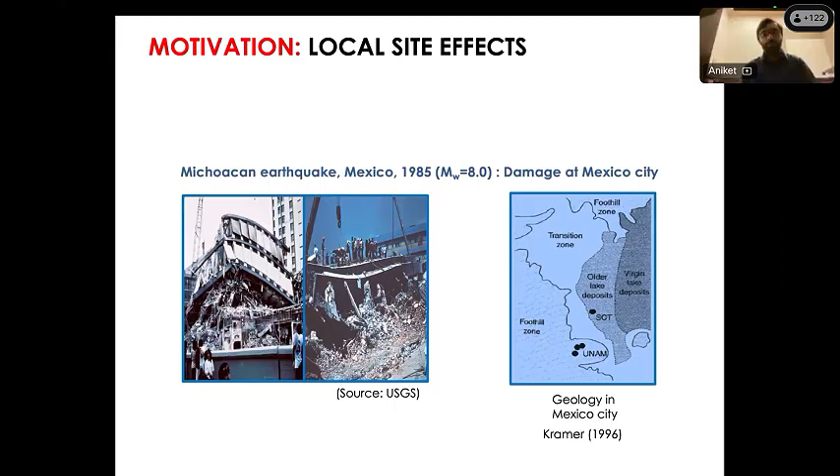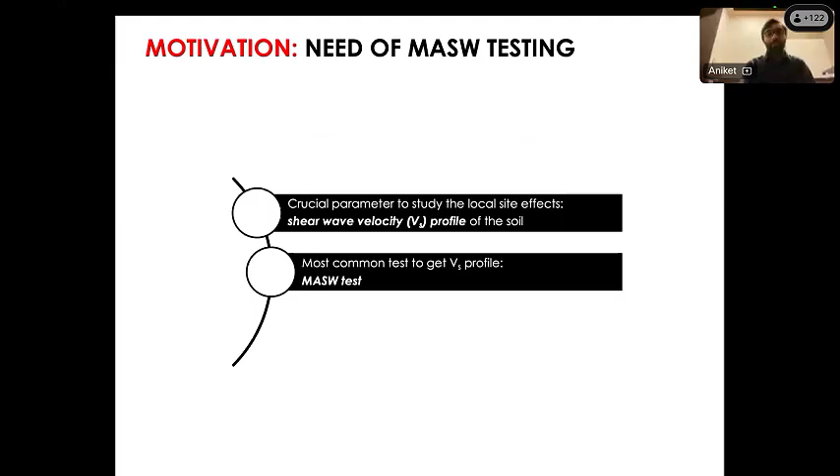So why is this MASW testing important? As we saw in the previous slide, it is very important to have knowledge of the soil characteristics, and for that the very important parameter is the shear wave velocity profile. For that, the most common method currently is the MASW test, although it was developed in 1999, but after that it has gained a lot of prominence.

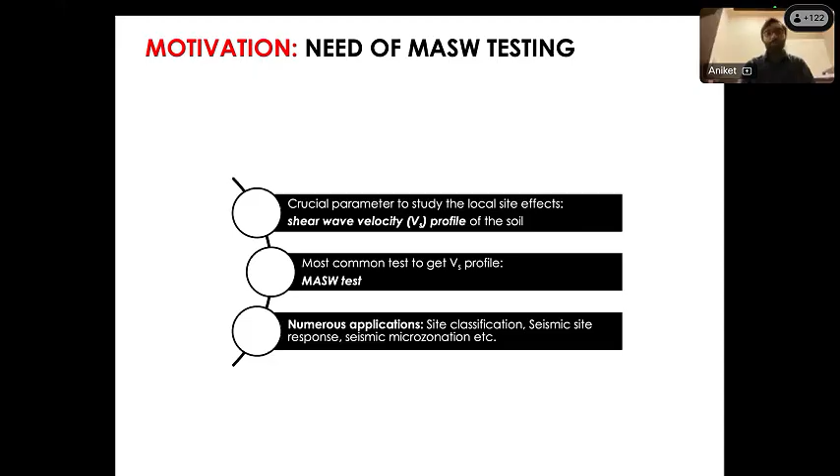Once you get the shear wave velocity profile, there are numerous things which you can obtain. First is site classification, then seismic site response, how the soil will behave. Then for any area you can do seismic microzonation. Even seismic hazard analysis can be done, and even for liquefaction analysis, the shear wave velocity profile is an important parameter. So with all this, the importance of the MASW test has increased in recent years.

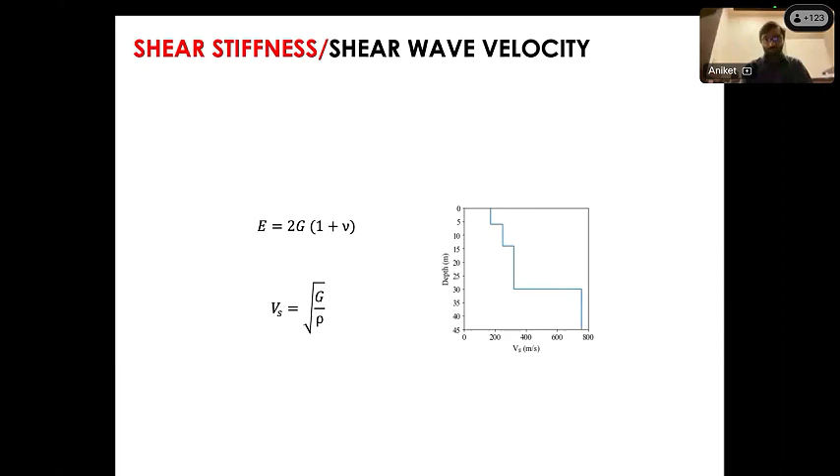Although this would be known to everyone, just for recap, I'm showing what shear wave velocity is. It is related to the shear modulus of soil, and on the right hand side a typical shear wave velocity profile is shown. It is obtained in a stepped shape from the MASW method, showing how the shear wave velocity varies with depth.

So what are the common tests available to obtain the shear wave velocity profile? Initially, conventionally, these geotechnical tests were preferred, which includes all the known tests: standard penetration test, cone penetration test, dilatometer and pressuremeter test. However, they have some limitations.

For example, from the standard penetration test, we obtain the N value, and to get the shear wave velocity we need to use a correlation between N and Vs. There are so many correlations available, and if you use different correlations, the Vs value obtained will be different. Another thing is the N-Vs correlation would be applicable only to a particular region. For example, somebody has developed an N-Vs correlation for Calicut, so that will be applicable to this region only.

So that is why when geophysical tests came, their use started gaining importance. The first test developed was spectral analysis of surface waves, in which only two geophones were used to record the waves, but it had its own limitations. Then multi-channel analysis of surface waves was developed, which contains multiple geophones, and its processing is even better than the SASW test. So it is the topic of my research till now.

Then there are some other methods also available: cross hole, uphole, downhole, seismic cone tests. These are all geophysical tests, and they have advantages in all three aspects: time, effort, and money. The time consumption is less compared to the conventional test. Effort required is less because labor is not required. All the geophysical tests are non-invasive tests. You do not need to drill a borehole, you do not need to bring out soil samples. You can just put it on the surface and get the results. Finally, in terms of money, this test consumes less amount of money compared to the conventional tests.

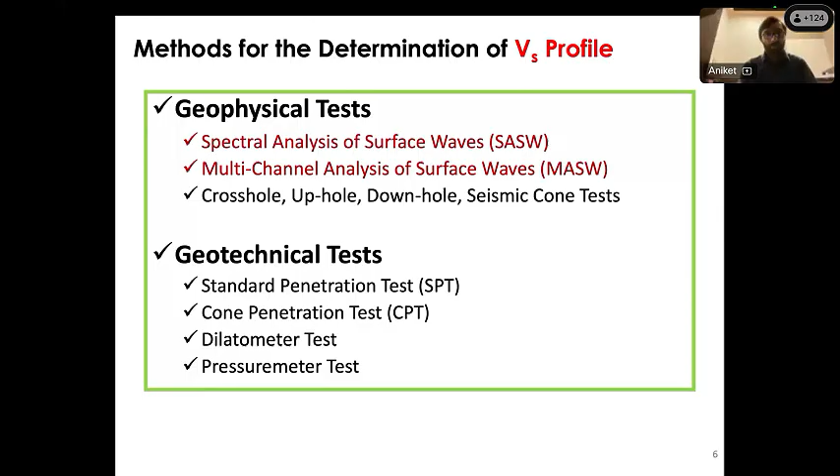Now let me show the concept behind this test. You can see this is a soil profile in which three soil layers are shown, and on this side we have kept an impact source. So what we'll do is drop the load and generate waves, so the waves will travel. When the waves travel, on the right hand side we have kept our geophones.

So the geophones will record the waves. An important thing which you may have observed is that the waves are generated, but some waves get restricted in the top layer itself. On the other hand, some waves will travel up to deeper depths.

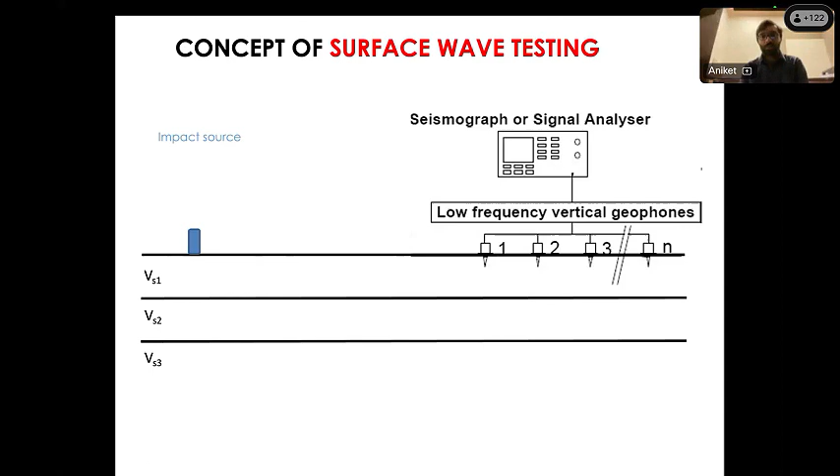Why does this happen? The phenomenon is that waves of different frequencies are generated, and waves of different frequency travel at different velocity and penetrate to different depths. This phenomenon is called dispersion of waves, and this is the basic phenomenon used in surface wave testing.

Now let us see how the methods evolved. Initially, the first test developed was the 1958 steady state vibration test, which has become obsolete now. Later, in 1983, the SASW test came. Then in 1999, the main test which I have worked upon, the MASW test, was developed. Recently, in 2018, some guidelines have been proposed to use this test.

Even when this test was developed, it had its own limitations, as people were not aware of the rules to be followed. So in 2018, a proper set of guidelines were developed, and finally an article showing the complete state-of-the-art review on the MASW test was published in 2023. This is how the evolution has gone for the surface wave methods.

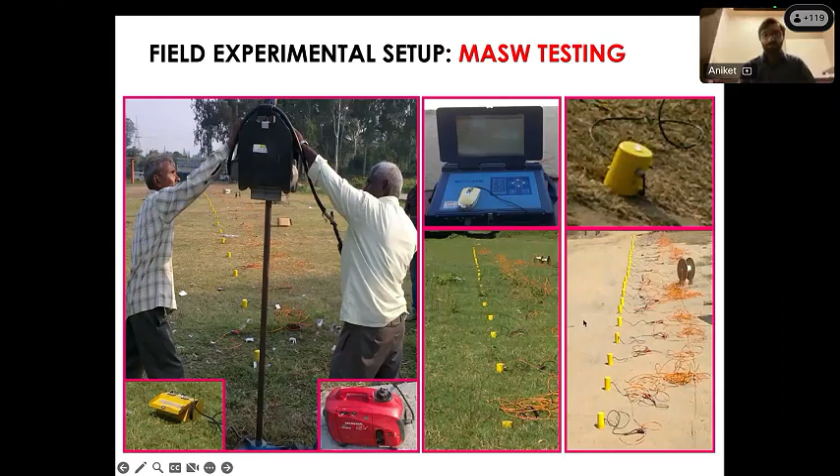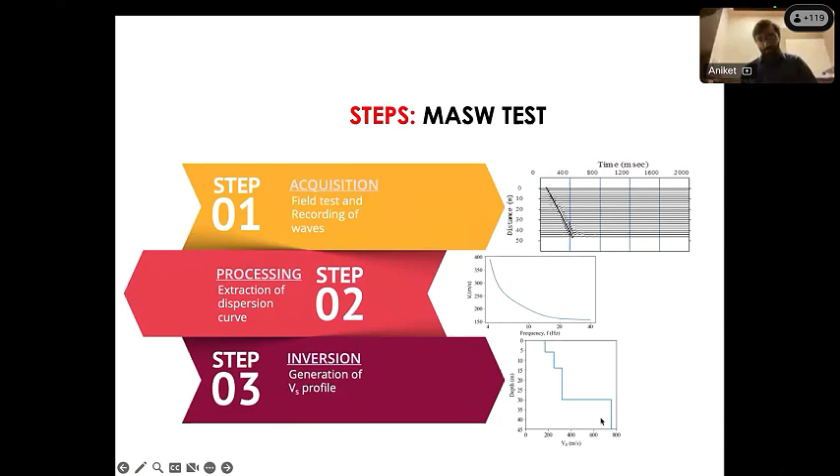Once we obtain this, there is step 3, called the inversion process, in which we apply inversion to this dispersion curve and obtain the shear wave velocity profile of the soil. So these are the 3 steps of the test.

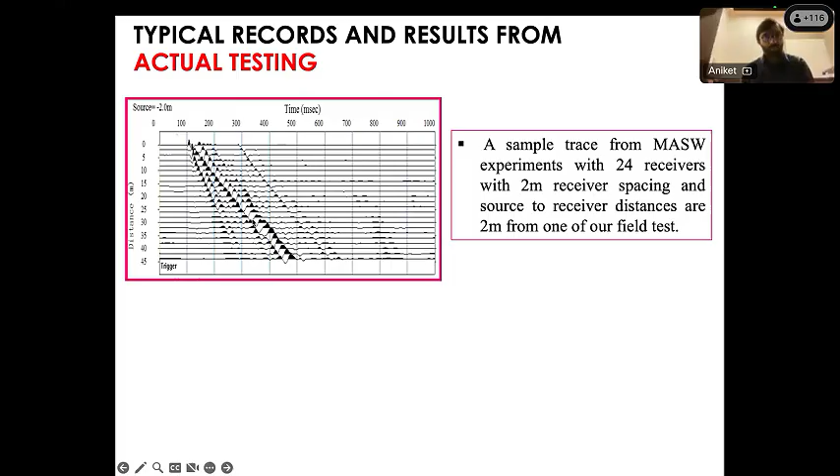Now I will show some typical records which we have obtained. This is a record obtained after applying one shot. You can see that from beginning to end there are 24 geophones. The first line shows the waves recorded on the first geophone, and similarly for the others. Initially the wave comes to the first geophone, closest to the hammer, then it will go to the second, third, and so on in order.

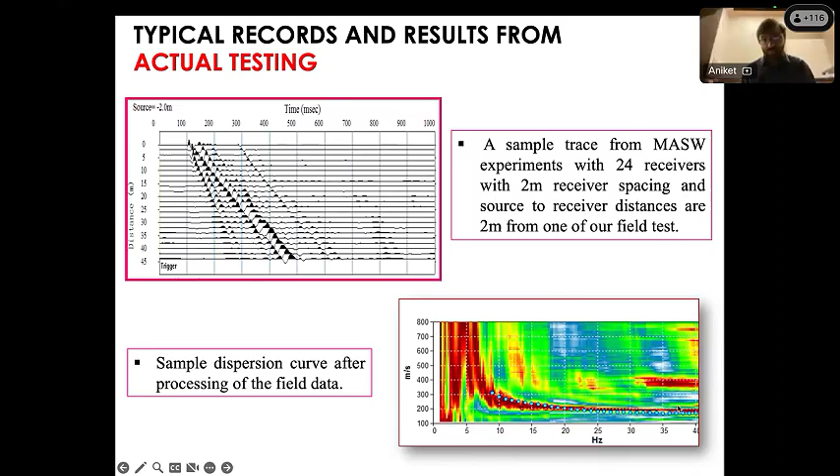Now when we process this using different methods, we can create this type of image, called a dispersion image. In this image there are particular regions showing concentration of energy. When we extract the data where the energy is concentrated, we get those points, and these points show the dispersion curve obtained from the field data.

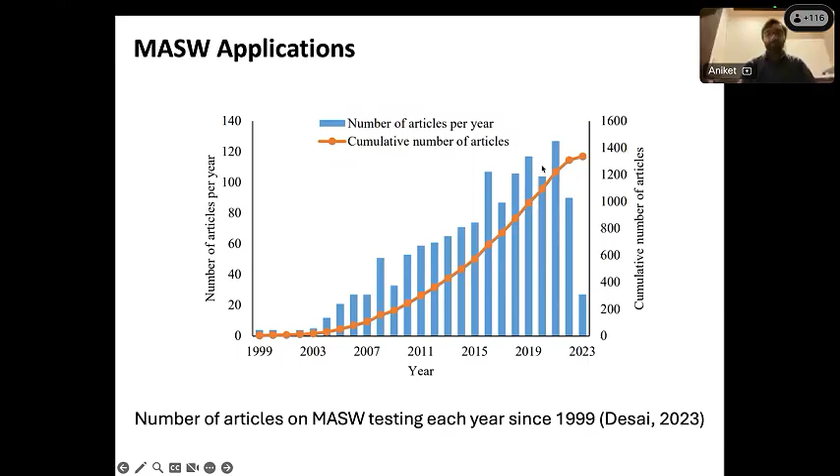Mainly, sometimes some area is very much earthquake prone and some construction activity is required, especially when the structure is of very importance, for example a dam or bridge. People do this test to get an idea of what will be the earthquake motion after amplification if some earthquake is expected.

Okay, so that is the main use. And then there are even sometimes after earthquakes, on a reconnaissance project, MASW test is used. Recently, when the 2023 Turkey earthquake occurred, that area itself was earthquake prone, that was known. So people had done MASW tests before the earthquake also, and then after the earthquake also, in a reconnaissance program, they did the MASW test and got the shear wave velocity profile.

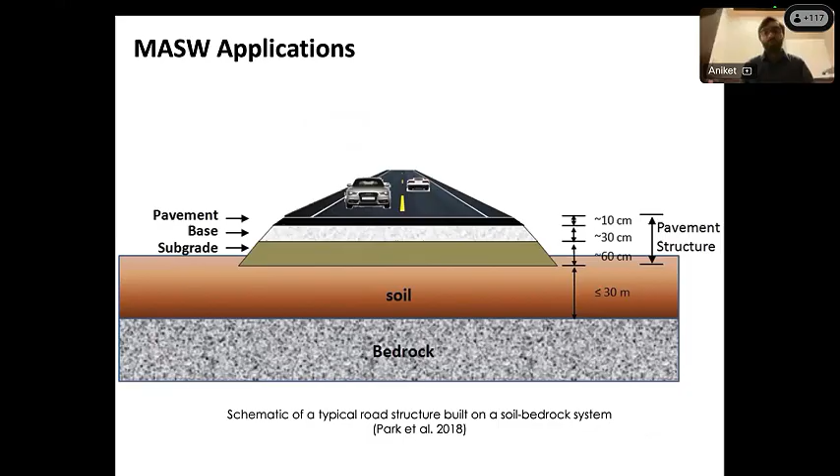Now there are some other applications which I will show. This is related to transportation engineering, so the task is design of a pavement. Even before designing pavement, the knowledge of soil properties is necessary. Sometimes even after designing the pavement, after all the construction, shear wave velocity profile is also necessary. So for that, these people have obtained the shear wave velocity profile.

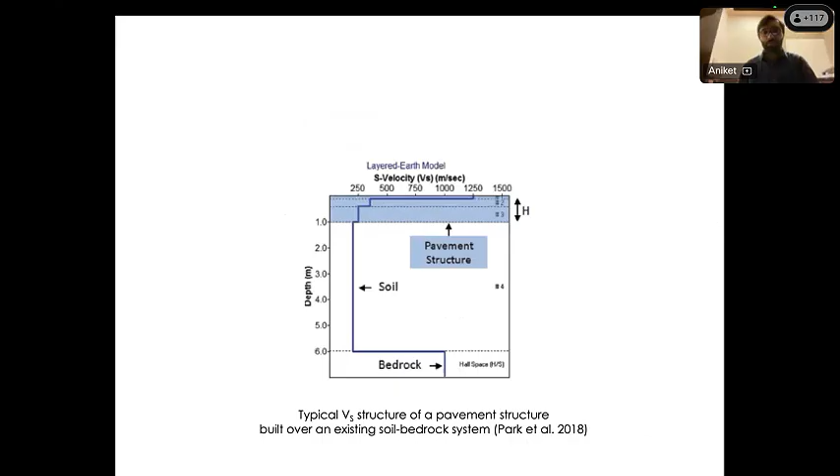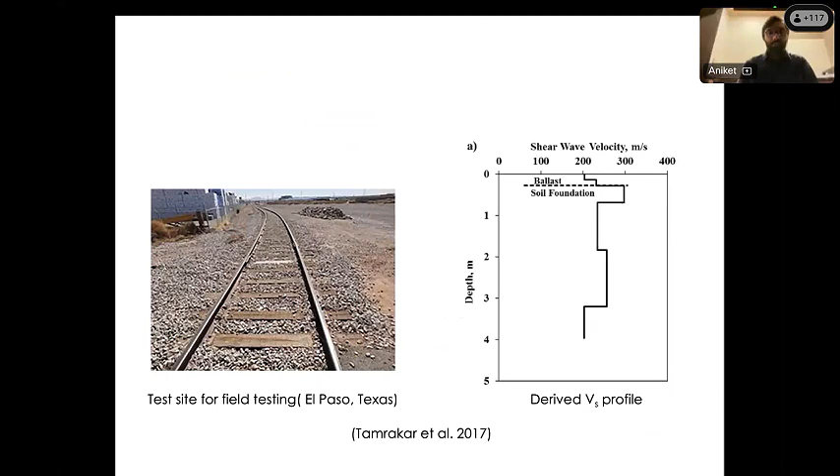This is another application related to a railway track. In railways, whenever a train is coming, some vibrations are generated, and sometimes that may also be causing some harm to the soil. So for that, an estimation of the shear wave velocity profile is necessary. In this study, they have obtained the shear wave velocity profile at the top few meters of the soil.

For example, let us say construction of some building is going to be done and soil investigation is required. Now people have to decide what should be the number of standard penetration tests to be done. Many times people don't know, so they roughly give the number, and that may create problems. Sometimes the number of SPTs done is very less, which will not give the actual idea of the soil. Sometimes the number of SPTs done is too high, which becomes uneconomical.

So what can be done is, initially in that area, a 2D VS profile of the soil can be obtained using the MASW method, which will give a preliminary idea of the heterogeneity of the soil. Suppose the soil is mostly homogeneous, maybe 3-4 standard penetration tests can be enough. On the other hand, if the soil is very heterogeneous, more standard penetration tests would be required. So this is how the MASW test can be used for any civil engineering project.

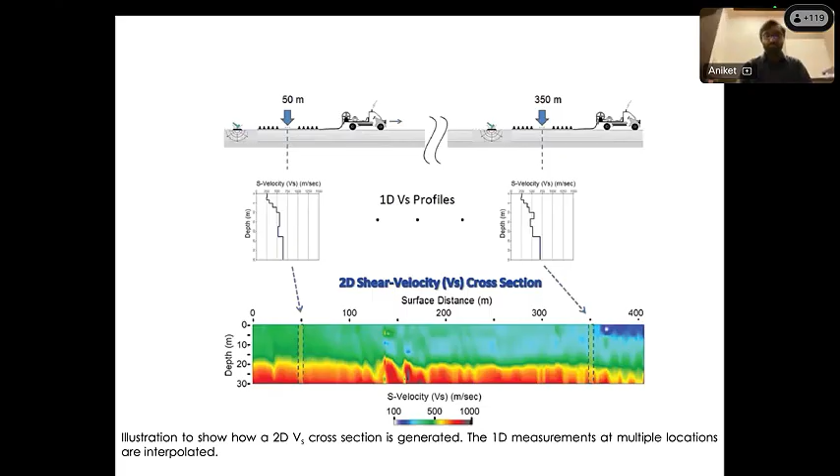This is another application at some road in USA. At this place, they have obtained the 2D shear wave velocity profile.

This is an application related to ground improvement or ground treatment. Many times before any construction activity, it is found that the soil does not have adequate properties to do construction, so people apply some ground improvement method to improve the soil properties.

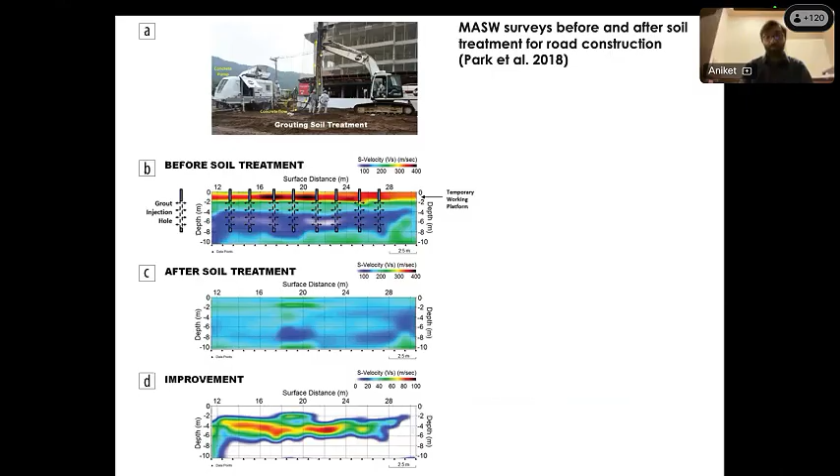Now the MASW test can be used to assess the improvement in soil properties after applying the ground treatment method. This first photo shows the site photo of one site, and then this picture shows the initial shear wave velocity profile before applying any soil treatment, and this shows the VS profile after applying the treatment.

If you observe here, ignoring this initial temporary working platform, majority of the portion is having this blue color, meaning shear wave velocity may be ranging near 100 only. On the other hand, after treatment this color has changed, coming mostly in the second region near 200. So in majority of the region the shear wave velocity has increased, meaning soil stiffness has increased. Finally, this third one shows the difference between this and this, the increase in shear wave velocity after applying the ground treatment.

Okay, so in this way we can make an assessment of the improvement in soil property after applying the ground treatment.

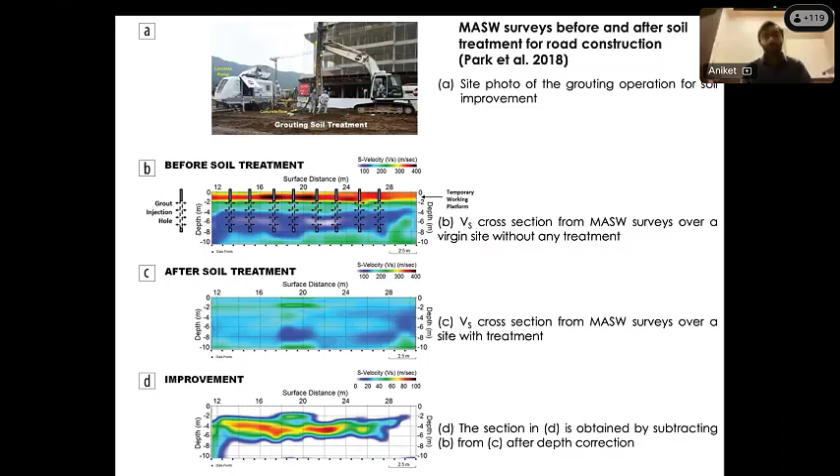Okay, now we have discussed the applications. However, there are some uncertainties present in the MASW testing. Mainly they are divided into three types.

First is model based uncertainty. The basic assumption of the MASW test is that only Rayleigh waves are generated when we apply the hammer. Although it is a fact that maximum energy generated is of Rayleigh waves, some amount of body waves are actually generated during the test, which we cannot ignore. Those body waves get mixed with the Rayleigh waves and they hinder the results which we obtain. So that generates uncertainty, called model based uncertainty.

Second type is data measurement uncertainty. This is related to noise. Whenever we apply hammer load, there is some noise present at the site, which may be due to passing vehicles, earth's vibrations, or a nearby water body like a river or sea. That again hinders the waves generated by our hammer.

Third type is inversion uncertainty. In this, when we obtain a single dispersion curve and do inversion, we can get multiple shear wave velocity profiles, which would all be equivalent to that one single dispersion curve. The VS profiles may be thousands. So which one is correct? We cannot directly tell. This is called inversion uncertainty.

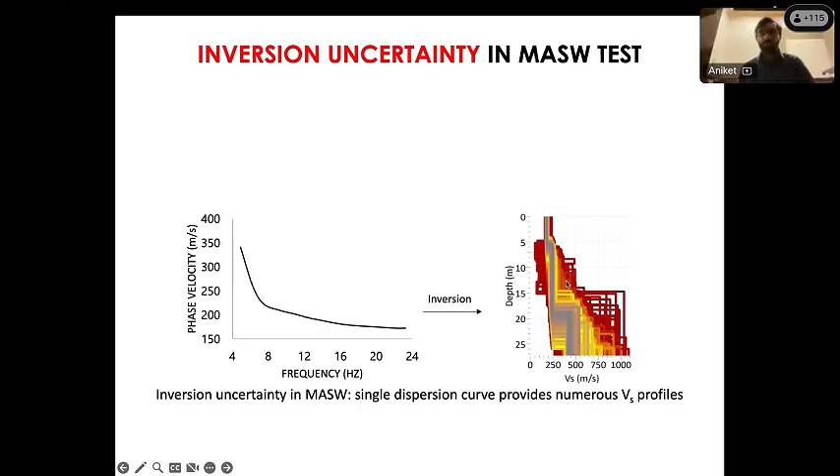Now let me give an idea about these uncertainties. Let us say this is a dispersion curve which we have obtained from our field testing. When we do the inversion, on the right hand side we can see that so many shear wave velocity profiles are obtained, starting from this gray color, which have low misfit value, meaning they show a better match to the actual dispersion curve. Then there are other profiles in red color which have higher misfit value, but are still equivalent to this dispersion curve.

Then the second type of uncertainty is data measurement uncertainty. What happens here is, at the same place, if we apply the hammer multiple times and take multiple shots, generating multiple dispersion curves, the dispersion curve will not be the same. We will get multiple dispersion curves which are different from each other. So which one should we take? That creates another uncertainty.

That's why it is suggested that rather than taking one single dispersion curve, a mean dispersion curve along with its standard deviation should be taken, so that we can account for the data measurement uncertainty.

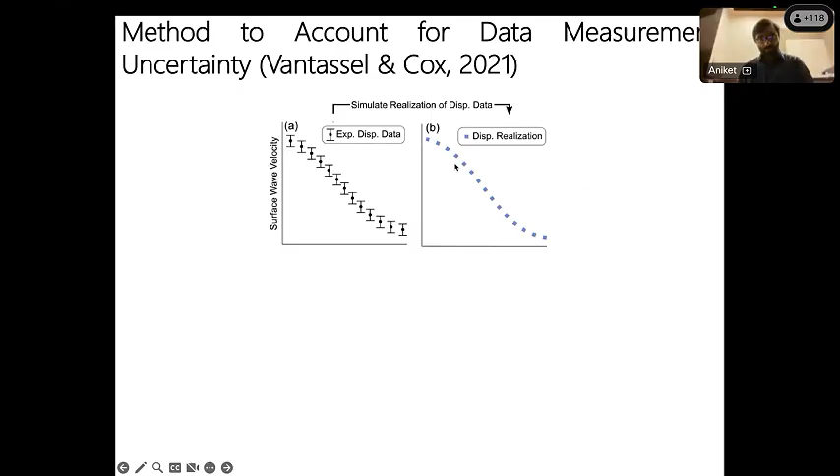In that, one specific method is there. Suppose we have an initial dispersion curve and its standard deviation. What we can do is, within this bound, generate a random dispersion curve like this shown here. Then we can do the inversion and get its theoretical dispersion curve, obtained after generating the shear wave velocity profile. This we can do multiple times.

Within this range, we can generate 100 or 200 dispersion curves. For each dispersion curve, we do the inversion and get the theoretical dispersion curve. So we get multiple inverted dispersion curves, and for them we get a mean and standard deviation, which should actually match with the initial mean plus or minus standard deviation curve. When we get such results, we can say that we have accounted for the data measurement uncertainty.

Next is the third type of uncertainty, called model based uncertainty. As I said, this is generated because of the presence of body waves. When we generate waves, both types are generated, body waves along with surface waves. With distance, body waves and surface waves get separated, because body waves attenuate very quickly compared to surface waves.

However, whenever the distance is small, whenever the hammer is very close to the geophone, in that particular setup this uncertainty can hinder your result very much. So this is called the model based uncertainty.

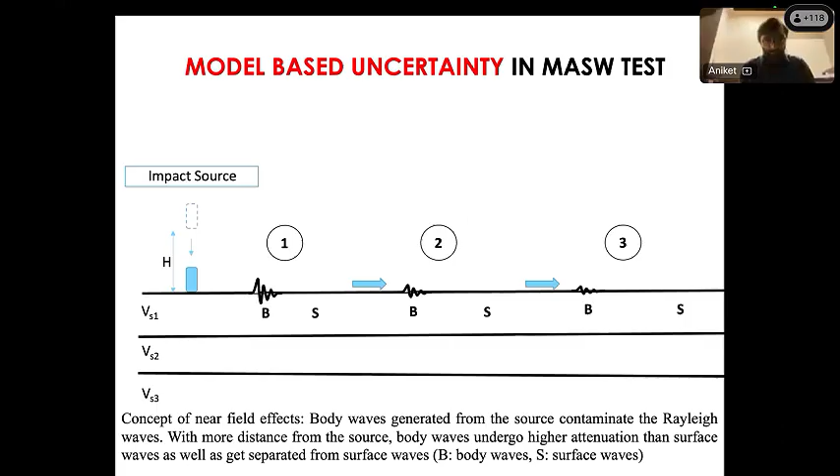This is also called near field effects, because this is shown mainly in the near region of your hammer shot area. So with all these uncertainties, whatever results we are obtaining from the MASW test would definitely contain some kind of uncertainties. So what guidelines should we follow to avoid these uncertainties? Some guidelines have been proposed, which I want to mention.

The first guideline is that the distance between the hammer source and the first geophone should be kept approximately 5 to 20 meters. We should not keep any distance less than this, and as far as possible we should keep it as much as possible. But whenever a specific source such as vibroseis is used, in which very systematic waves are generated, in that case source offset can be kept higher.

Then the second rule is about the spacing of geophones. Wherever there is an array of geophones, we have to specify the inter-geophone distance, which is specified as 1 to 4 meters. It should not be kept higher than this, because that will decrease the resolution of your final dispersion image.

Then the length of the geophone array should be kept approximately 23 to 96 meters. This array length is related to how much depth of investigation you can obtain. Generally, suppose your array length is 96 meters, in that case you can get the shear wave velocity profile up to 96 by 2, that is 48 meters. So your array length decides how much VS profile depth can be obtained.

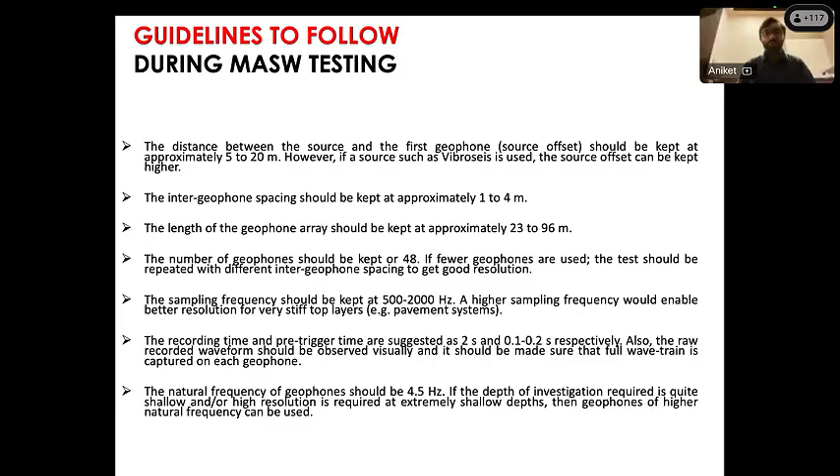Then that is about the quality of geophones. Generally the natural frequency of geophones should be 4.5 hertz, which we used in our testing. If you need data at higher depth, maybe greater than 30 or 40 meters, then a geophone of lower natural frequency should be used, because low frequency is associated with higher investigation depth. At our laboratory, when I was doing my PhD, we had one setup with geophones of natural frequency 2 hertz, which we used when we wanted to get higher depth data.

Then coming to the mass of the sledgehammer, which should be at least 5 kg. But if you have a heavier sledgehammer, it has the capacity to give the VS profile up to higher depths. Then this is about how many shots should be taken.

One problem is that if you take only one shot, it would contain noise. On the other hand, if you take 5 shots and then club them, combine them, stack them, in that case you can remove the effect of noise, or at least minimize it. So it is suggested that at one site itself, you take at least 5 to 20 shots.

Then it is suggested to take a forward and reverse shot also, because at some place there may be lateral heterogeneity. To avoid that, we should take a shot from forward and reverse directions. That means suppose your array is kept fixed, you need to take the shot from the left end also, and after finishing, take one shot from the right side also.

And then one more is, if any a priori information from other tests is used, for example if you have data from any other test like CPT or SPT, you can combine the results of MASW and SPT. In the processing of MASW you need to select the layer thickness and layer numbers, so if you have additional detail about that, it will be useful to get better results.

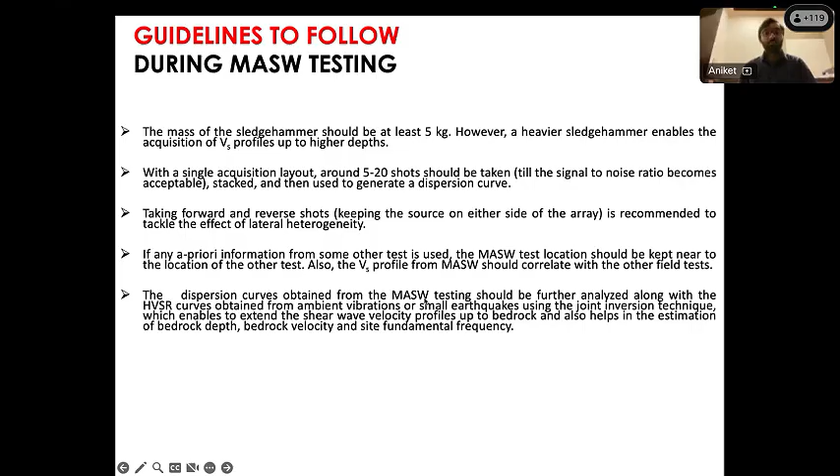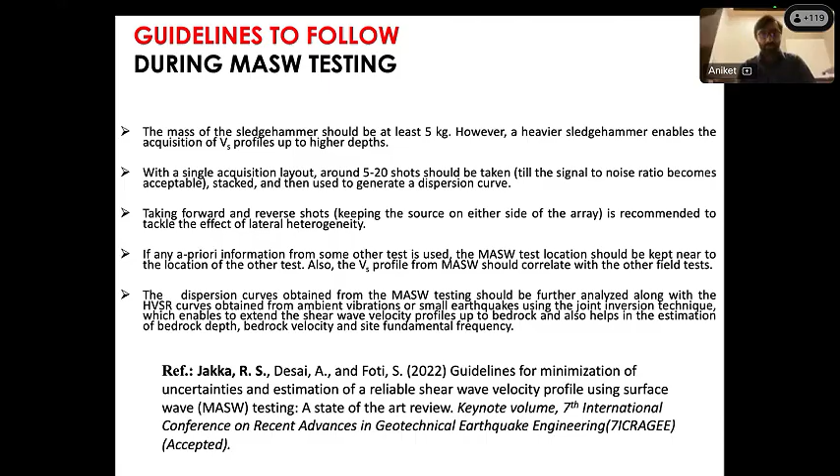Okay, so overall these are the guidelines. These guidelines are mentioned in this article, which is a book chapter published by us in 2022. Let me go through the summary.